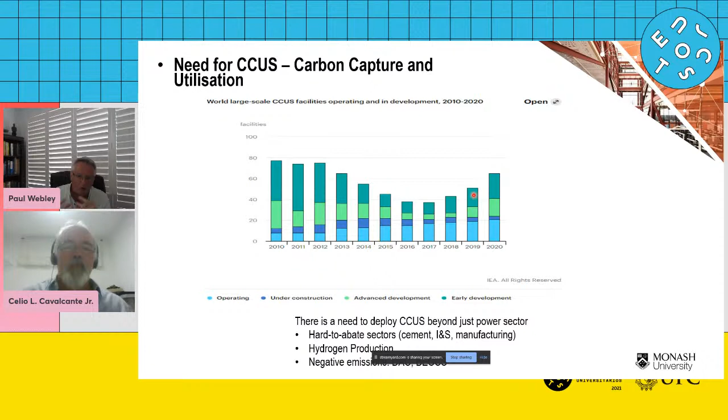I should also mention, it's not on the slide here, but generating very high purity CO2 using the Allam cycle with natural gas is increasingly something of great interest. It's a very efficient cycle. It uses oxygen instead of air for burning. It produces a stream of 100% CO2 at high pressure, ready for sequestration, and generates electricity at about a 60% thermal efficiency, which is fantastic. It's almost unheard of, and rivals renewable energy generation. So those are areas that all are going to require carbon capture, utilization, and storage.

So I'm going to turn now, in the interest of time, on my clock here. Adsorbent systems is something we've been working on for 20 years to try and do capture. There's still a lot of work going on. There are no commercial, large-scale post-combustion systems that use adsorbents. They all use absorbents. And I show here just a diagram of one that's probably the closest to commercial reality. And this is a company called Inventys. They're now called Svante, and they are in Canada, and they have an adsorbent placed on laminate sheets, rotating around a sort of a merry-go-round, where in stream 1, flue gas flows in, you capture the CO2, and you vent this CO2 lean gas.

Then this adsorption section moves to another section where steam strips off the CO2, collects the product, and then we have to condition the material so that it's ready for re-adsorbing. We do that with flue gas, and then the adsorbent moves to the final section where it has to be cooled down because it was heated up, and then it's now ready in the cool stage to go back into the vent.

So you can see there's a little diagram, a little photograph here of the system. It's quite a small system, a few tons a day, but this uses an adsorbent to do capture, and a very, very specialized adsorbent that has to be coated onto laminate sheets, to make sure that we don't put a lot of pressure drop on the system. So you can see that we're sort of at technology readiness level 5, 6 with adsorbent systems in comparison to absorption systems, which are, of course, operating already and have been for many years.

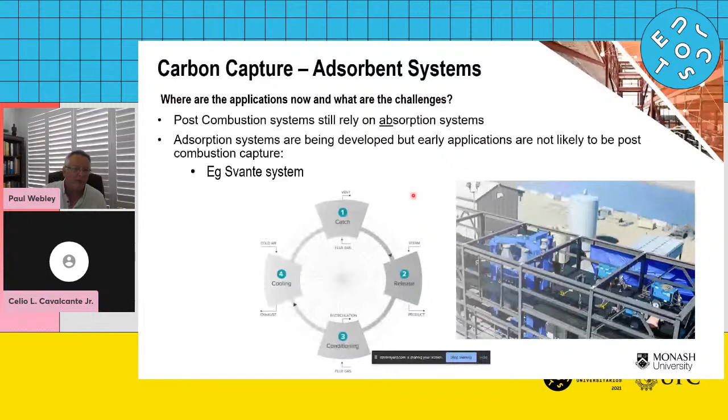So in terms of the applications, we've been looking at CO2 removal from the tail gas of hydrogen PSAs. Hydrogen PSA separates CO2 from hydrogen to produce very pure hydrogen. And its waste gas still contains a lot of hydrogen, maybe 10 or 15%, but has a lot of CO2 in it. And that's very, very useful. Instead of taking that gas and venting it or burning it, we can recover the CO2 from that gas.

I mentioned earlier, cement, iron, and steel are systems that we're looking at. And increasingly, I don't think there's an academic lab in the world that isn't looking at direct air capture. It's certainly got the attention of investors and banks and engineers, and in fact, Woodside is very interested in direct air capture. The reality, I think, is always a lot more sober than the excitement around it.

Landfill gas and biofermentation is an area that hasn't got a lot of attention, and I think it should, because there we potentially have an opportunity for negative emissions. And I think there's a lot of landfills out there where the gases are not being treated because it's too expensive to treat them, and they're being emitted or burnt. If there is an opportunity to capture that CO2 and store it, you actually have a negative carbon flow, and potentially you could earn carbon credits if you did that.

And so all of these applications have in common rather good things for adsorption. The CO2 concentration is often quite high, 30 to 50%. That's certainly more than flue gas. The challenge for us as adsorption engineers is they're multi-component systems. All of us who study adsorption know about multi-component systems. We have difficulty measuring multi-component isotherms. We have difficulty modeling them, especially if there are 5, 10, or 15 components. Our simulators take a very long time to simulate a 20-component system.

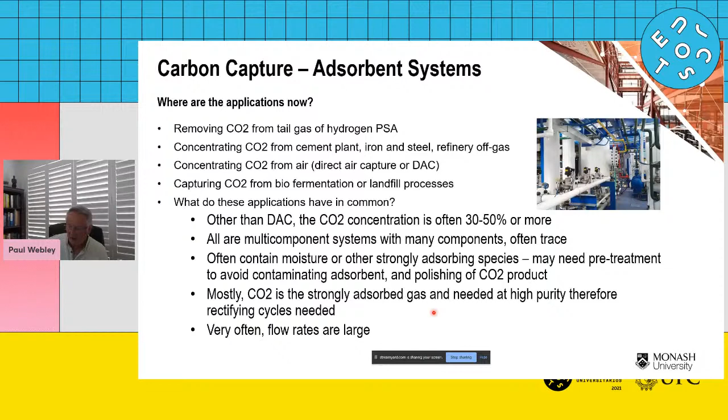So it's been calculated that a direct air capture plant, to capture the CO2 from a 500 megawatt power plant, would be about 30 kilometers squared in terms of its footprint. So direct air capture as a solution to all of our problems is definitely not going to be the solution. They are very, very large.

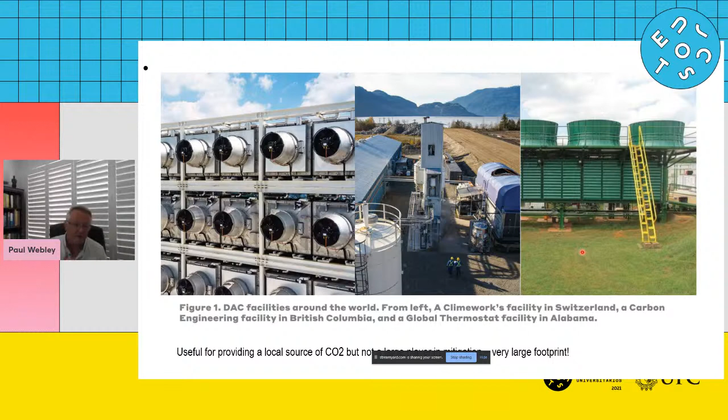Many of them, the ones on the left and right, rely on solid adsorbents. The one in the middle relies on a liquid system. And so potentially, I think if we're going to go down the route of adsorption for carbon capture, it has to be very much focusing on our strengths. So smaller scale, higher pressure, higher CO2 levels, where we can have an impact.

So what are some of the challenges? I'm going to talk a little bit about some of the challenges, and then show you quickly some of the work that we've been doing. We need a high working capacity for CO2 because we have such high flow rates. So we tend to favor chemisorbents rather than physisorbents, because chemisorbents have a strong chemical bond to the CO2.

We have to produce high selectivity materials. If we don't have a very high selectivity, that means that we obtain a lot of the other molecules that are in the gas stream: nitrogen, methane, oxygen. They're very similar in size to CO2. So trying to separate them purely on the basis of size is very difficult.

If we separate them purely on the basis of how strongly they attach to the surface, then all of those molecules attach to various extents. CO2 the strongest, but nitrogen, methane, and oxygen will also adsorb. So when you go to recover that CO2, you will also recover those other molecules. We'd rather not adsorb the water if we can help that. That's very, very difficult to do on an adsorbent.

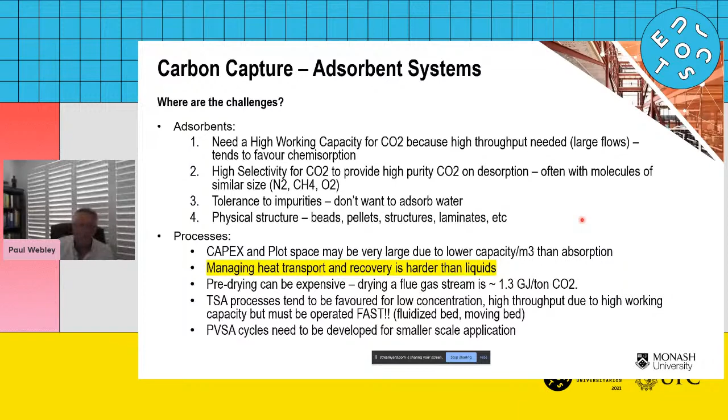But it was a collaboration to try and understand: can we use these new zeolites, well, new zeolites that are actually very old, what we call trapdoor zeolites, to separate carbon dioxide and methane? And trapdoor zeolites are zeolites that have the ability to change the position of their cations to uniquely allow admission of CO2 and prevent the admission of methane.

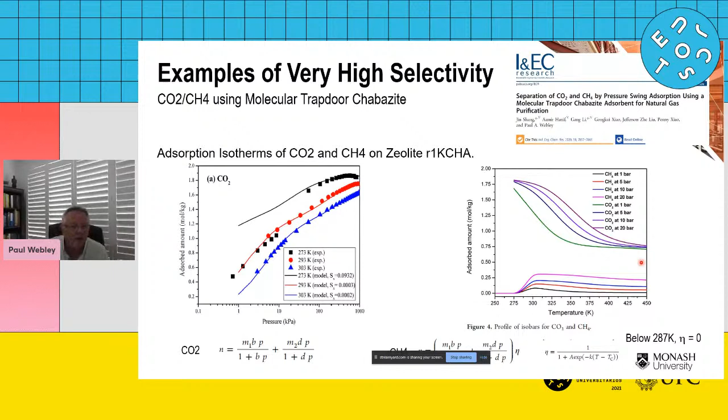Then we came up with a simulation system that allows us to see what we get. We have a single bed that represents 5 steps. We feed, remove the methane and adsorb the CO2. We depressurize to blow down, because we're feeding at 20 bar, down to 1 bar to get rid of a lot of the methane. Then we desorb under vacuum, which removes a lot of the CO2. We'll still have methane in the void space, so we get contamination of that product, and then repressurize.

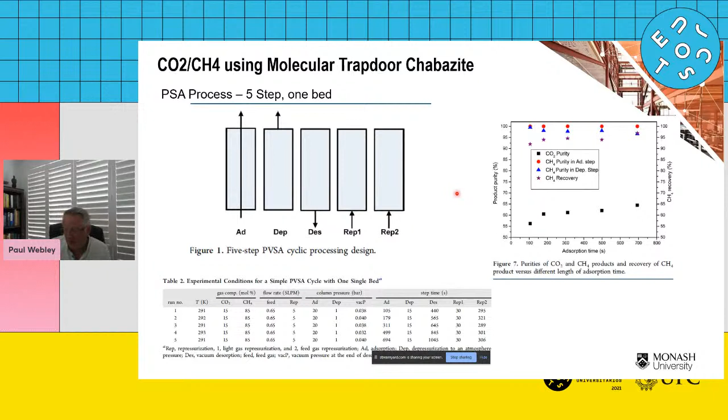But we were very successful in obtaining very high purity methane. The CO2 purity is not too bad, around 65%. Going up from 15 to 65 is pretty impressive. Improving it would require two things: one, dropping the bed temperature down to 0, which gives zero co-adsorption of methane, and second, perhaps changing the cycle to introduce more sophistication. But it's a very promising result and shows there are adsorbents out there that can be uniquely tuned to this application.

So on that note, I'll take a step back and talk generally about adsorbents. I classify them as 3 generations. The first generation were ones used since antiquity, since the 1800s if not before: naturally occurring things our ancestors found in nature and used as is, finding they helped with removing odors or removing toxic chemicals from wastewater. It was trial and error. Then between the 1940s and the 1990s, we started learning how to make those naturally occurring materials synthetically.

For example, making our own activated carbon adsorbents from polymers, or making our own zeolites, and synthesizing our own structures, learning from nature, and then modifying them, either post-modification or pre-modification, and then using those in an adsorption process. And so that was all the fields of new zeolites and new crystalline and carbon and silica materials that have been developed, and that by and large we still use today.

And then I'd like to think that we've now sort of entered the era of the 3rd generation of adsorbents, which are really in their infancy now, where the adsorbent material in the past was always inert. You made it and you put it into place and it worked. We're now starting to see adsorbents which are active. They actually involve themselves in the adsorption process, and they can flex and they can change, and they are much more dynamically involved in the separation process than the 2nd generation ones were.

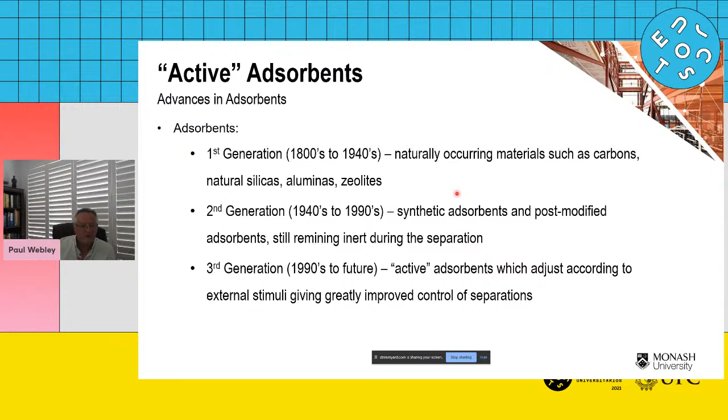So for example, framework deformation, we've all seen this if you've worked in metal organic frameworks. There are some molecules you can put into a metal organic framework, and right away it changes the framework flexibility, almost like an egg crate that gets crushed. As soon as you put the molecule in, it distorts the framework. You can apply an electric field or an electromagnetic field, and you can change the shape of that framework, and in doing so you can change its adsorption properties.

The pore keeping groups are really interesting. They are atomic molecular groups within the pore spaces, like benzene rings or other structures that are flexible, that can move. And so if you externally stimulate them or you interact with a guest, they shift, and in their physical shifting, they open up more space and they allow access to the internal space.

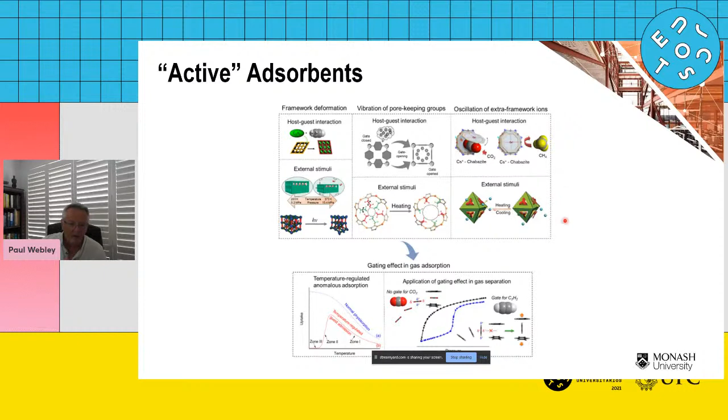Let me turn to the next one. That just shows you again an example at the bottom of, in this case, an adsorbent. I'm shining light onto it, and when I shine light onto it, it changes its structure. It actually gets smaller. The framework contracts. And it's because the linkages in the framework are made with molecules which undergo a cis-trans conformation when you shine light on them. And so they become smaller and they exclude molecules.

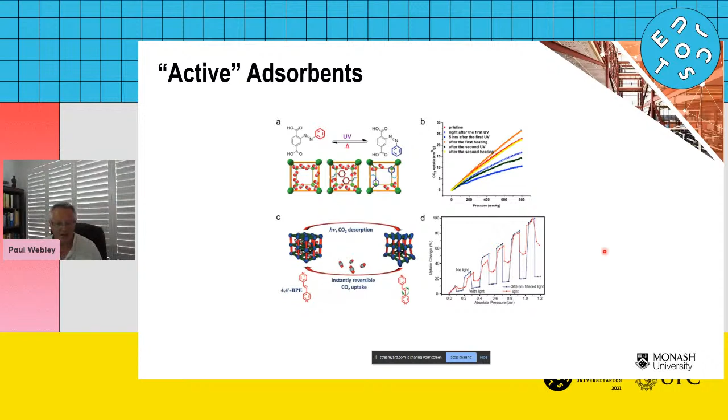And you can see this wonderful isotherm. This is not our work, where you can almost see the two isotherms here. And we can switch between the two by shining light onto the material and then removing the light. And you can see how the CO2 isotherm steps up and down. So a wonderful example of a material where you could potentially have light stimulated adsorption.

And then before I move into the utilization discussion, structured adsorbents are materials that are basically the same adsorbent, but we no longer have them in beads. And we've become accustomed to beads and granules and pellets because that's all we had for the last 100 years. But increasingly, I'm seeing the need that the adsorbent is actually not the major part of the process. The process itself dictates and informs what the adsorbent should look like.

So we may have to start doing much more research. Our adsorption community needs to do much more research on forming the adsorbent into a form that's more appropriate to the process, other than just saying, we've made crystals, we've made them in the lab, we've made pellets, here you go, engineer, go and deal with them. That's no longer going to be enough. We really have to be much smarter about how we make the adsorbents.

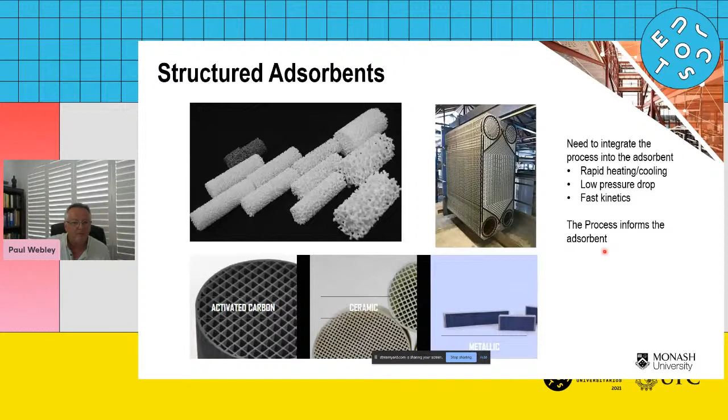So let me just turn my attention. We've got about 5 minutes. I won't go through a lot.

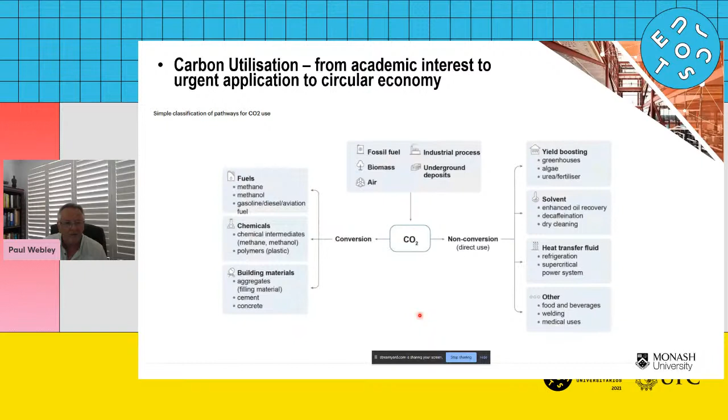Carbon utilization is something that we increasingly are getting into. And it's really a process of capturing the CO2 and then doing something with it. You can either make chemicals and fuels and building materials with it, or you can actually use it as is for a lot of applications. And I think in both instances, you're going to need the CO2 either high purity, or you're going to need it at high pressure. And the CO2 can come from a range of different sources here.

So we've been very interested in combining our adsorption knowledge with reaction to try and improve the CO2 utilization. And the reaction we're looking at is making methanol from CO2. A lot of people are doing this, reacting carbon dioxide with hydrogen to make methanol, and we also make water. That's a reaction limited by equilibrium considerations. And so you can imagine that anything you can do to change the local concentrations of these species wherever the reaction system is occurring will have an effect on the process.

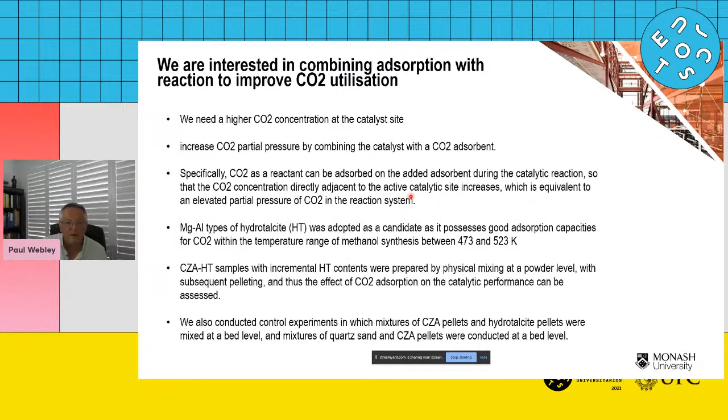And I won't go through all of this text here, but really it's the motivation behind our work. We took a commercial catalyst, we ground it up into a powder, we took a hydrotalcite adsorbent, and we mixed it with that catalyst to see, does the presence of an adsorbent right next to the catalyst help this process?

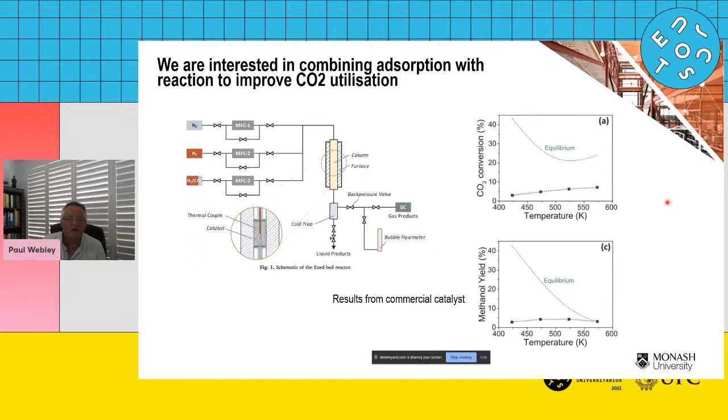And just to show you this nice little reactor that we have, most groups have got that. You probably have them at your university. And this graph just highlights the fact that the conversion and yield that we get with a commercial catalyst are so far away from equilibrium. You can see how heavily off we are from equilibrium. And therefore it gives us some motivation that we still have quite a long way to go.

So what we've done now is we've mixed our catalyst and our adsorbent, and we call them CH0, which means it's a copper catalyst with 0 amount of hydrotalcite. So that one there is all catalyst, and then CH100 is all hydrotalcite. We had to make sure that the hydrotalcite wasn't catalytic.

And you can see, we would have expected, if the hydrotalcite had no role at all, we would just linearly decrease as you decrease the amount of catalyst in the bed. And that's not what we saw. We saw quite a lot of retention of the conversion, even up to 40% hydrotalcite. So we can see that there is a positive effect here. It doesn't help us with the conversion because we're still stuck with the copper catalyst, but it does help us to retain that and reduce the amount of copper.

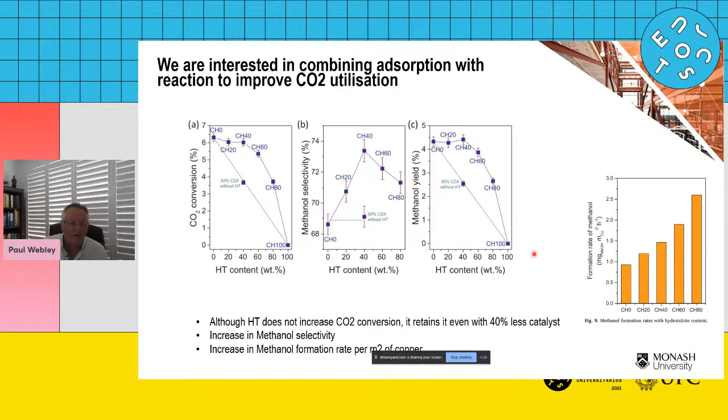And interestingly, it increases the selectivity quite remarkably, going from about 68% up to 74%, and increasing the methanol yield. So very interesting results. And obviously we have a long way to go to explore a lot more of these.

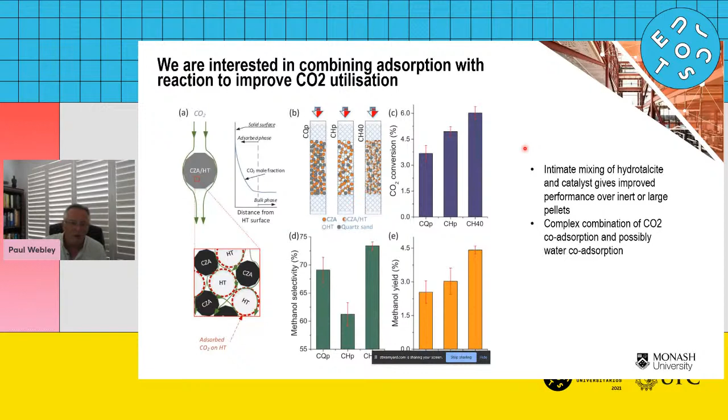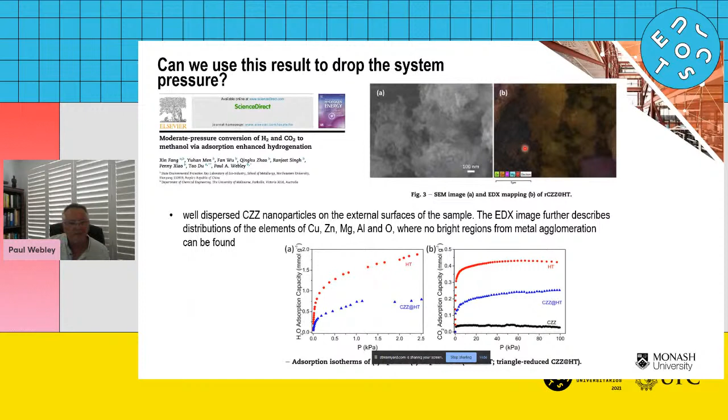And our next stage, and I won't have time to talk about this because I'd like to close off, is to actually precipitate and form the copper catalyst on top of the hydrotalcite. And that has its own set of challenges, and I'm not going to go through that in the interests of time because I want to just close off with some general comments.

So the challenges of integrating capture with utilization, I think, are going to be first and foremost, if you look at a conventional capture process like this liquid phase one: we absorb the CO2, we have to strip it out, we have to compress it. This is where all the energy is taken up, the reboiler and the compression. And that's where the 2 to 3 gigajoules per ton comes in.

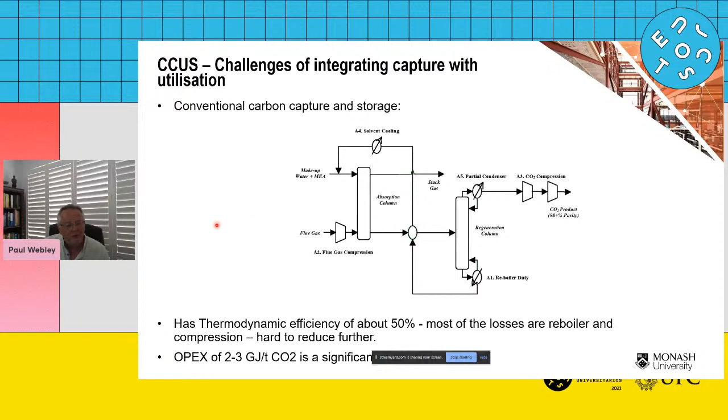How do we lower that? How do we actually get rid of that? And there's a lot of interest to say, why don't we just get rid of this part of the flow sheet? We capture the CO2, and then we use that amine-captured CO2 structure to do something with. Or we capture the CO2, but we don't capture it at high purity.

And so I think some of the challenges that we hopefully can overcome in the years to come is that there is a very high capture cost burden for the subsequent U part of the CCUS. We're all interested in using CO2, but we have to capture it first. And there are niche applications that rely on high purity CO2, but they're very, very few.

Many of the applications for CO2 utilization, like the one I've just showed you to make methanol, if there's oxygen there, the products that you make, the methanol, is going to be oxidized right back to CO2 again. And of course, unfortunately, we are capturing CO2 from air streams that contain oxygen.

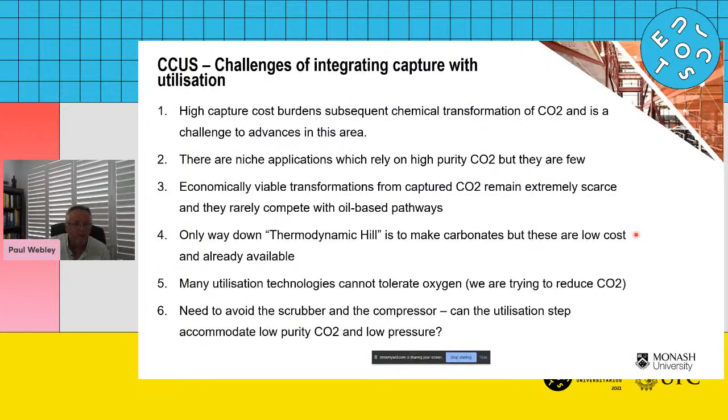So that means if we want to do a capture and a methanol process, we have to have very, very high purity, which is very difficult to do in a capture process. And so we have to think about how do we integrate capture and utilization in a much, much cleverer way. So one of the things that we're doing at Monash University, and this is still a work in progress, is we're setting up a research hub in carbon utilization and recycling.

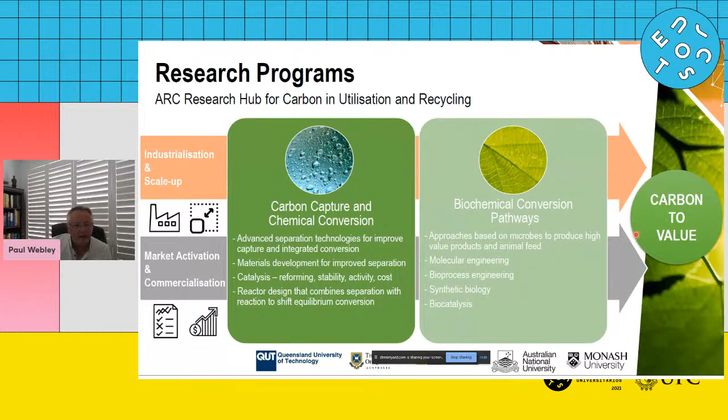And it's got both the capture component and the biological conversion component in it, as well as some other components. I'll just show you, and this is my last slide, an overall view. As a chemical engineer, I couldn't resist having the last slide as a process flow diagram. Our research hub, you can see 5 universities involved: Queensland University of Technology, Curtin, ANU, and ourselves. We'd love to have your university involved.

We're looking at all aspects. We have electrochemical engineers looking at electrolysis. We've got people working on DAC. We've got a lot of expertise in these universities in the biochemical area. I'm very fond of the biochemical area, and the reason is that it can tolerate air. Nature has evolved in a way that can tolerate air, and the plants can use carbon dioxide and create plants.

So they're going through a reduction process in the presence of oxygen. And so let's try and use that knowledge from plants and do something with it. The problem with biochemical processes is they are very slow to use CO2. They use CO very well. And so carbon monoxide can be used very easily from an electrolysis cell to make carbon monoxide and hydrogen and feed that into a biochemical process.